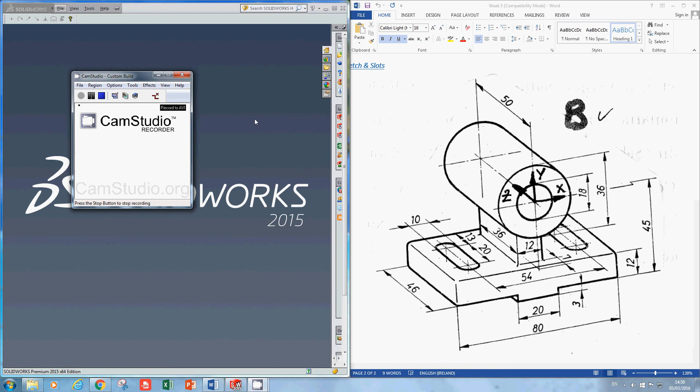Hi lads, so this is a quick video tutorial to go through that second part, that second example from class week 5. So it's a bracket that's shown here on the right.

The way we're going to do this one is we're going to use the shared sketch command again. So we're going to start by drawing this full sketch, and then we're going to share the sketch and use it multiple times to create the various different extrusions.

Just to note on this before we start, I'm going to draw the full thing. I'm not just going to mirror half of it. I could use a mirror, but there's no need for this. We're not kind of practicing the mirror command for this one. So I'm going to draw that full sketch.

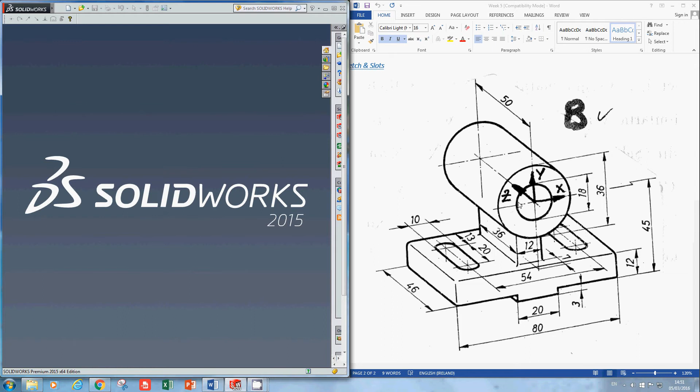Also to note that it's symmetric about the plus Z and minus Z direction, so when we're doing the extrusions we need to be using the mid-plane extrude for all of them. So mid-plane extrude 46 for this bottom section, mid-plane extrude of 36 for the middle section, and a mid-plane extrude of 50 for the upper section. That'll become clearer as we're going down through it and doing the extrusions. Let's just get started straight away.

Click on New and Part, click OK, and Sketch tab, and a sketch here in the top. And we're starting on the front plane again as usual.

So for me, I'm going to start with the origin as this point here. I'm going to start on the origin. So I'm going to just draw the two circles first. The first one is a diameter 18, the second one is diameter 36.

Circle command up the top, just going to draw two circles roughly, any size really, both of them starting at the origin, and then dimensioning them. So the first one is going to be 18, and the second one is going to be 36. So that's the two of them dimensioned.

The next step I'm going to do, I'm going to draw this rectangle here. So for the bottom sections here, I'm going to do two center point rectangles. I'm going to draw one big one here and then another small one here.

Coming across again to the SolidWorks, just click the drop down, select center rectangle, and just drop it kind of directly under the origin there. So I'm just going to draw one quite large.

For the second one I'm going to make sure that it's directly under this again. Starting it there, and I'm going to make sure that it snaps to the bottom edge of that first rectangle, so I'm just going to snap it to there roughly. Okay, so that's the two of them done.

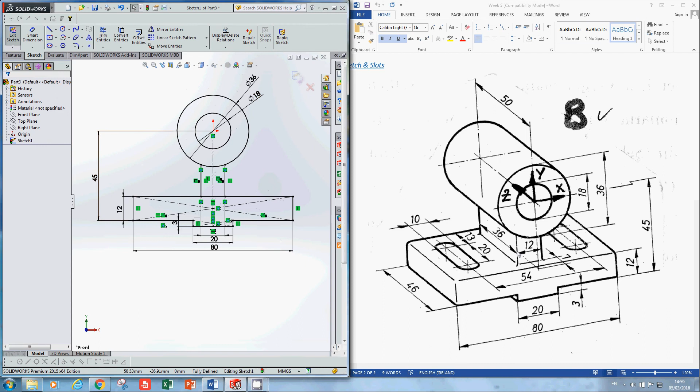Just zoom out to get the whole lot of it in there again. So that's it, that's my full sketch. So I can exit, just to check, fully defined here in the bottom, so I can exit sketch.

So the first section I'm going to extrude. We start at the bottom and work our way up. So that bottom section is 46. Let's extrude it. So features, extruded boss base. Just click on that bottom section. So click on the line at the bottom.

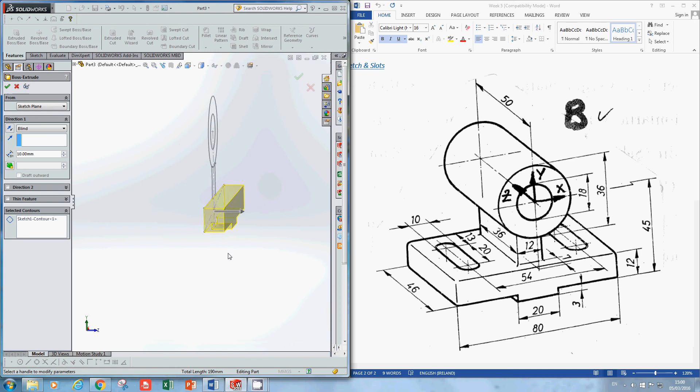And if it is a case that didn't come up correct, that there might be a case that thin feature was automatically popped up, just deselect it, and you may need to delete the contour from there and then reselect it again. Now if it came up first time, don't do any of those last two steps, but just note that you may need to deselect this thin feature.

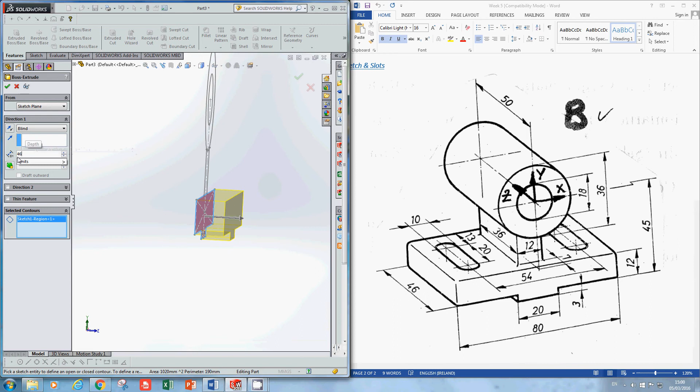So I need to extrude that 46mm, but I want to do it in a mid-plane extrude so that the center always remains on the sketch, so that I can extrude the 36 the next time from the center as well.

So just to change that, you come up to direction 1, click on the drop down, select mid-plane, and you'll see it's going 23 this way, 23 the other way, and yeah, that's it. That's exactly what I want. So click OK to that.

So now you see that automatically in SolidWorks, once I use a sketch once, it disappears, because it assumes you only want to use a sketch once. In this case, we want to use it multiple times. So in order to reactivate the sketch, click the little plus beside the boss extrude, and you'll see there's my sketch. So I just right click on the sketch and click on the glasses to show the sketch again, and there you'll see that the sketch is active again.

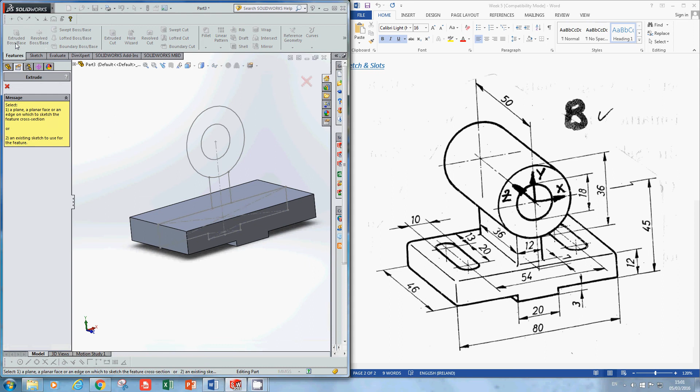So the next step is to extrude this section here. I want to extrude that little rib 36mm. So click on extruded boss, back down into the sketch, click on one of the edges, and again you'll see this time that the thin feature has come up. Just deselect it, delete the contour from the selected contours, and then come across to the graphics area and you can select that region again.

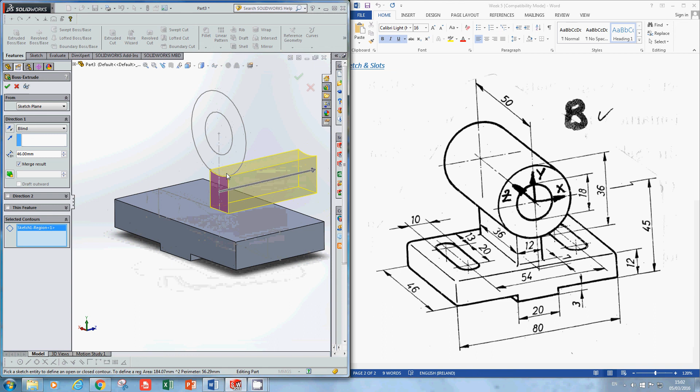If you see me spinning, I'm literally just clicking on the wheel or the middle button on the mouse and rotating it, so that I can see what SolidWorks is going to apply before it applies it. So then come across here, direction 1, and select mid plane, and I don't want 46, I want 36 for this middle one. Just click on 36, and I'm left clicking in the graphics area to activate the preview, and that looks right to me, so I'm going to click OK.

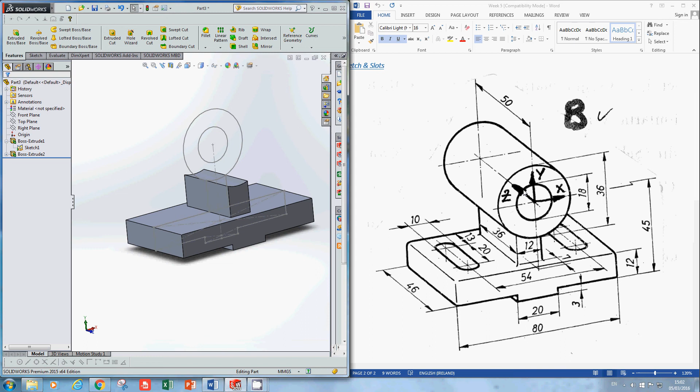Finally is the center boss, or the cylinder here at the top. So for that one, again, extruded boss base, click on the outside circle, and I don't want that full cylinder, I want just this cylinder. That inside shouldn't be there. So to deselect that, just click into the selected contours, and if I click on that center circle now, it'll delete it from what it's going to extrude.

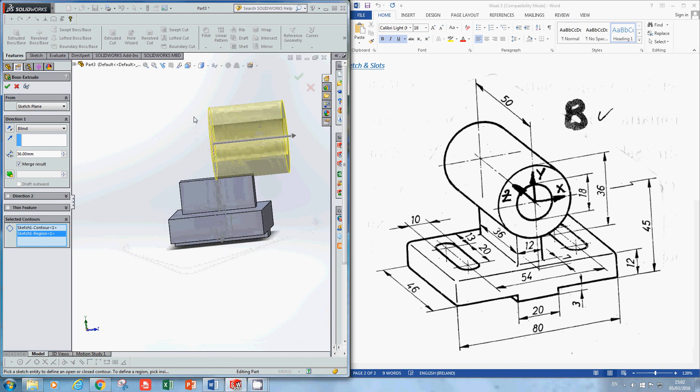So again, just rotating it slightly to see what it's going to be applying, and again I want the mid plane for this one. So direction 1, click the drop down beside blind and select mid plane, and I don't want 36, I want 50. So we'll put 50 in there and hit enter to apply the preview, or else you can just click out here. That looks pretty good to me, and click OK.

So once that's done, that's everything I need the sketch for, so I can turn off the sketch again. That sketch is located inside any of these plus boxes. If you hit the plus to open the drop down, sketch 1 has been used for all of the extrudes, so I can deactivate it from any of the 3 of them. So right click on the sketch and come up to the glasses again, and now it's showing hide instead of show. Just click on hide, and it deactivates that sketch. When you're finished, close up all these expand boxes to keep the feature manager, or the feature tree, nice and tidy.

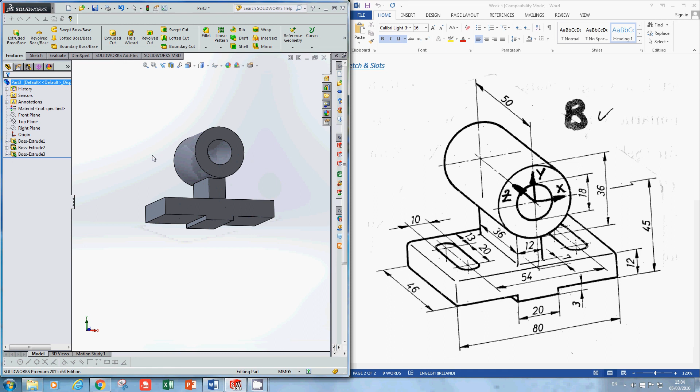So that's the main part drawn. The next and final thing that I need to add to this is the slots. If you come across to the drawing again, you'll see that I have 2 slots, one slot here and one slot here. The dimensions for it are 20 from center to center. Now that's important to note. The distances given here for the slot length are from the center points, so it's 20 from the center of that to the center of that.

The overall slot length is actually the distance between the 2 center points plus the radius by 2. So the radius plus the 20, plus the radius again. I'm given the 10 here, so that's the diameter, or the radius times 2. So my overall slot length is 10 plus 20, which is 30. Also to note, because we will need it, the distance from this top edge to the edge of the slot is 8. It's given as 13 to the center, but I want it to the top of the slot, which is 13 minus 5, the radius, so it's 8. So we'll get cracking on that.

So just quickly to note, I could apply these using Sketch. I could go into Sketch, use the slot command, draw a slot here, and extrude a cut. It's a little bit slower, and also once that's applied as a cut, it just comes up in the feature manager as a cut. It's easier and nicer if you use the hole wizard.

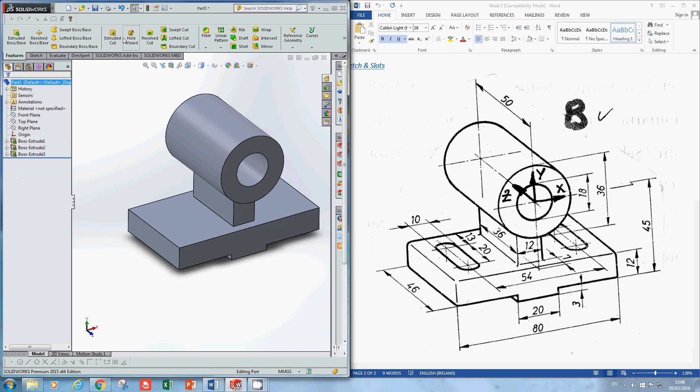So if I click on hole wizard, there was enough jabbering there, so we'll put them on it. Click on hole wizard. So for hole type, I'm coming down to the bottom right hand corner and I'm clicking on slot. Standard is ISO, type is drill sizes, and size is diameter 10. So that's my diameter 10 here, the slot width. I need to click on show custom sizing just to have a quick look at it. So again, the slot diameter is 10 and the slot length is 30.

Now you will need to change that. The reason it's at 30 for me is this isn't my first time doing this video. It's actually my third, so hopefully this time it'll actually work. So it's coming up as 30 because I've put it in already previously. Anyway, so that's slot length 30.

End condition is through all. So again, through all is needed for this one because these two slots are going all the way through. So end condition through all you want to select there. Don't worry about any of the rest of them. If these are selected, deselect them. So we're not going to be worrying about these for now.

So that's it. So once you have all these set, click on positions, and it's asking me to select face for hole or slot. So I want this face here, so click on that face, and then I'm just rotating it slightly with the middle wheel of the mouse. So just drop in two slots. Don't worry about the orientation of them, we can change them later. So once you have the two of them dropped, just right click and hit select.

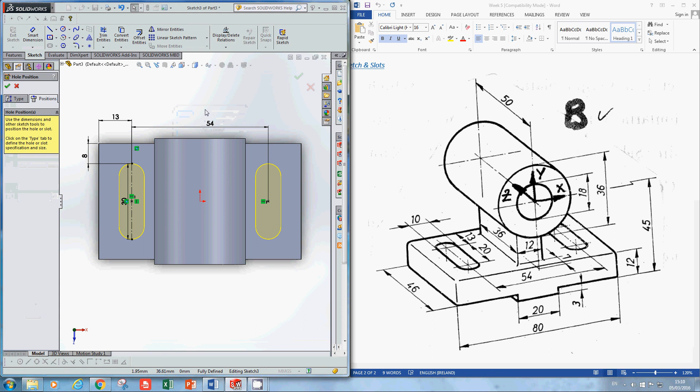So back across again, smart dimension, and 13 mil here. I know I could add 13 mil here, but I'll just use the dimension that was given in the drawing, and that was 54. So that's that. And just dropping down quickly, I'm fully defined, so I can exit the sketch. Just click OK there to apply that. So it looks pretty good.

That is the two slots, and again, as I was rambling on there earlier, just to show you here, it's a diameter 10 slot, so it's very quick to see what that is. There could be a case where you have 10 different sizes of slots in a part, and it's very quick to see which slot is which from that. So that's it for that part.